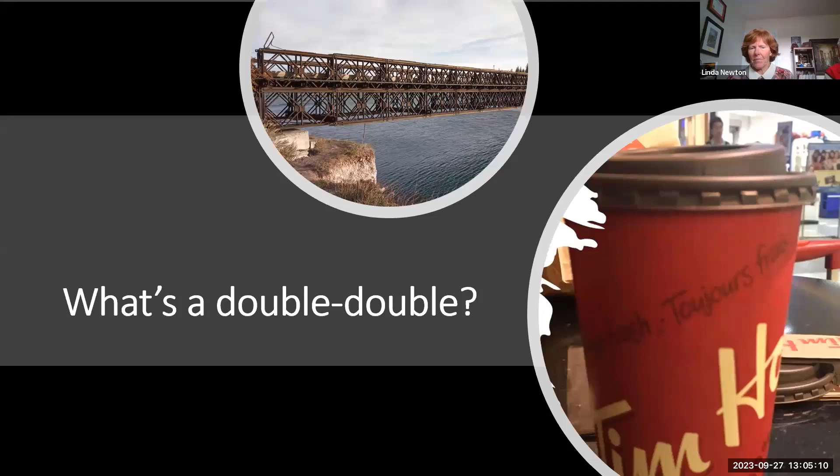Well, you're going to find out.

So the presentation isn't completely about the Royal Canadian Military Engineers. Obviously, we have to set some context and go into the Bailey Bridge and its design and what was so unique about it, give you a bit of background about the Royal Canadian Engineers. Some of you may know, I'm sure we have quite a few engineers listening. Then we'll talk about why it was so special to World War II and what made it what it was, and realize, as many of you have seen this bridge and not know it is still out there and not realize what it was. So we'll look at that.

So to come back to the Bailey Bridge and to come back to the role of military engineers, whether they're the Royal Canadian Engineers, the Royal Engineers in the UK, or the Engineer Corps in the US, the military engineers' role is to support mobility of friendly forces and deny that mobility to the enemy. So in times of conflict, engineers build roads, they build bridges, and at the same time they destroy them so that the enemy can't use them.

Now, the design of the Bailey Bridge was first proposed by Donald Bailey in 1936. He was sketching on the back of a napkin. He was a model bridge enthusiast, and he worked for the Experimental Bridging Establishment in the UK. Now, as the war continued, people looked at his design and went, 'That's really nice, Donald. Now go away and do what you normally do.'

But as the war continued and the Allied forces started to gain ground and the momentum started to shift, they started to consider the invasion of Europe. And there were two places they were going to invade Europe, Italy, and also hopefully landing at Normandy. And obviously, the retreating forces, their engineers would be blowing up those bridges. So you needed to have some means that the advancing forces could quickly get over those gaps, whether it was over a canal, over a river, a tank ditch, or something they had constructed to impede mobility. And the retreating Axis forces destroyed virtually every bridge to delay the advance.

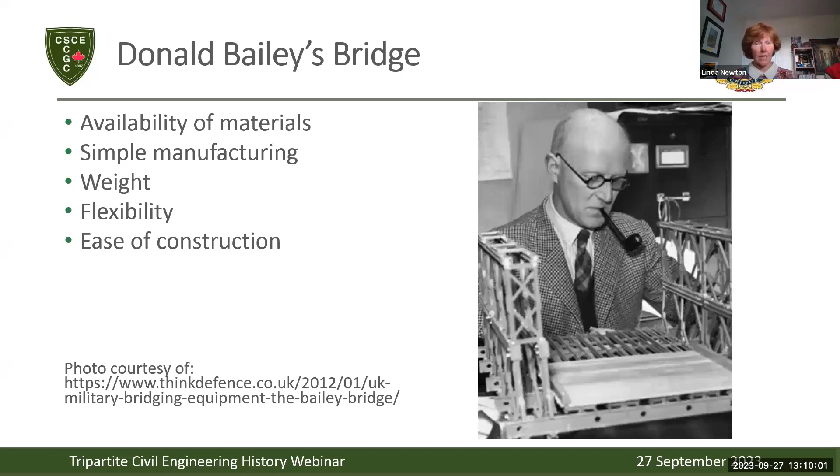So this final design had 28 welded steel parts. There's some discussion as to whether it was 29, but the consensus is 28 parts that you can see here, varying from things such as the stringers, the transoms, the panels. The panels were the key component.

Now, what was remarkable about this bridge is that an engineer troop comprised 40 men at the time, and they could assemble, under perfect conditions, a 24-meter or 80-foot bridge in about 4 hours by day and about 8 hours by night. And they could push that bridge across the gap. Larger bridges, you may need to bring up a small dozer to help, but that was the extent of what was needed at the time for Bailey's Bridge.

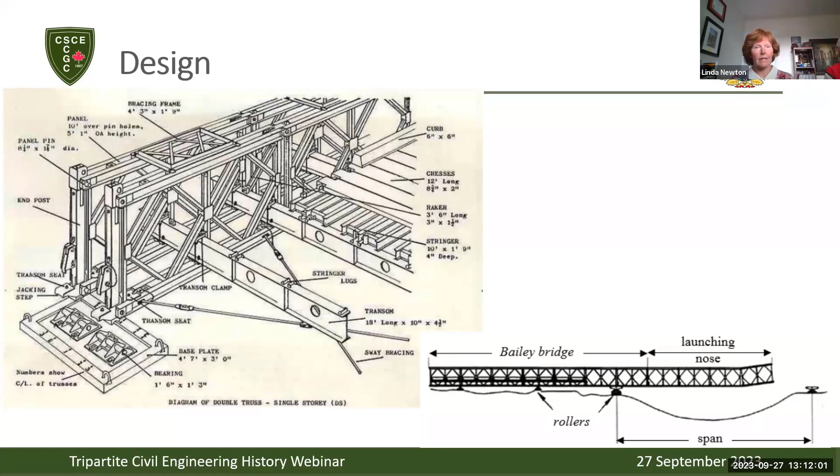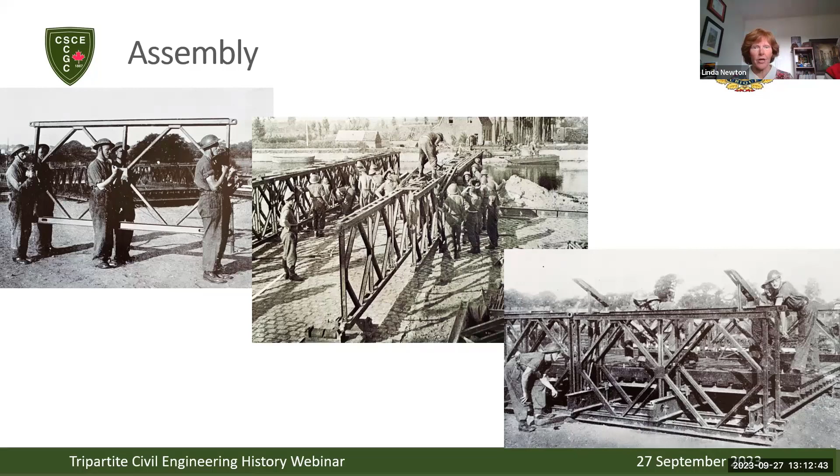But in the middle picture, at the very front of it, you can start to see that roller, and that's the nose that was going to be launched over the gap. This picture on the bottom right is an example of what that bridge would look like. I think this was when they were doing training at one of the bases, perhaps, to learn how to construct the bridge. So now think back to that double-double word.

So the configuration of the bridge became known by how it was built. A single truss, meaning it had 1 panel wide and was 1 panel high, was a single. If it was 2 panels wide and 1 panel high, it was a double single. And hence the double was a double panel, so double truss, double story. And so that is where the acronym double-double came from, not from Tim Hortons. I'm not sure if Tim Hortons stole it from the engineers, but you still hear that terminology. You'll hear triple, somebody wants 3 creams and 3 sugars. But a triple would be a Bailey Bridge, 3 trusses wide, 3 stories high.

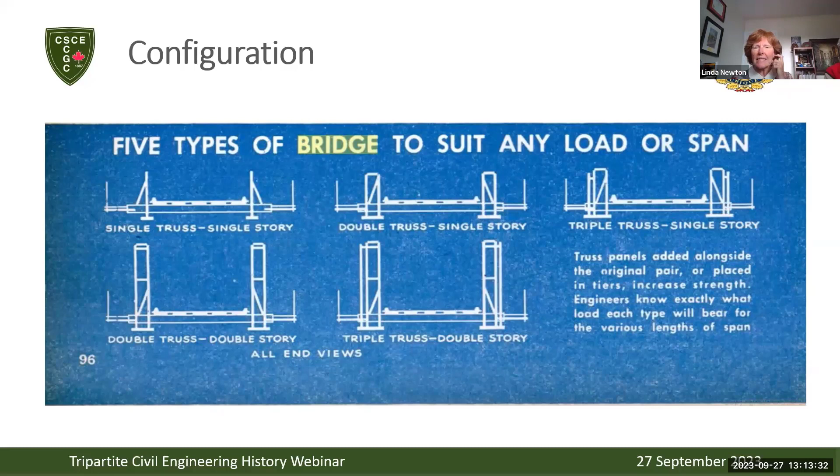Now, the next slide I'm going to show you is to give you a sense of the load capacity. So this is the military load class. And I know there are a lot of numbers on this slide, but the intent behind it is to give you an idea of the load capacity, how it increased based on the configuration of that bridge.

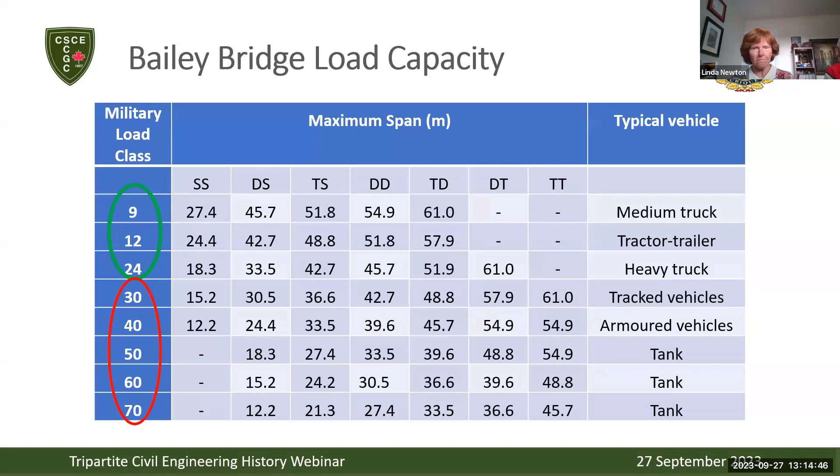I mentioned earlier about variations. Not every gap is going to be a dry gap. And so the unique nature of this bridge is that there were 4 basic variations that you could have. You could have a single span bridge, or you could have a multi-span bridge that would use perhaps existing piers. You may have to repair those piers to span greater gaps. Those would be used to replace a bridge that had been destroyed by enemy forces.

There was also a floating or a pontoon bridge, which was pretty cool. The bridge would be built on pontoons in sections and floated into place and then linked up. And so these were the types of bridges that would span, say, the Rhine or the Arno, or other longer gaps.

And that was particularly important because the canals were necessary to move materials as the forces advanced through Europe. As many of you may be aware, there's quite an extensive canal system in the Netherlands, in France, in southern Germany, and Western Germany. And so this lift bridge was developed to replace very low temporary spans over canals.

So in total, over 600 firms were involved in manufacturing this bridge. Over 500,000 tons, that's not metric tons, were eventually constructed of the Bailey Bridge, all to support the war effort.

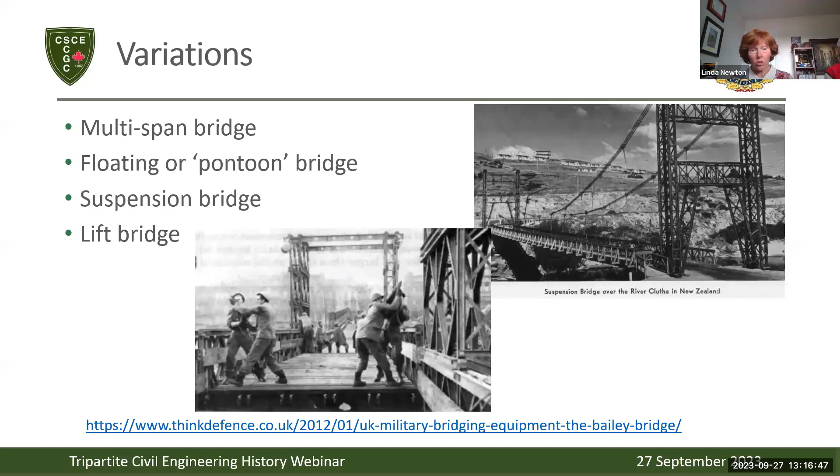So now back to another part of the title, the Royal Engineers. The Royal Canadian Engineers have been around for a little over 100 years. And the Corps, if you like, itself was formed in 1903 out of militia units. Before that particular time, you would have some professional soldiers, you would have ad hoc militia groups.

In fact, here where I live in Ottawa, one of our most famous pieces of infrastructure is the Rideau Canal, which was built by the Royal Engineers and Lieutenant Colonel John By. But in 1903, all of these units came together to create a regular force unit, and that became known as the Royal Canadian Engineers.

By the time the Second World War came about, you can see the ranks had swelled to what you see here: 680 officers, almost 16,000 other ranks, from sappers or privates up to chief warrant officers. And these engineers punched well above their weight, as you're going to see in the next few slides.

Canadian Army war effort was assigned, among many things, to building Bailey bridges to support the advance through the Italian campaign, into Sicily, and into Northwest Europe. The three battalions that formed part of this establishment took on the construction of many of the major bridges in World War II.

And during that time, the basic unit was a field company or a field squadron, and it would have had 7 officers and 249 other ranks. So that was who would be involved in building these bridges as a basic unit.

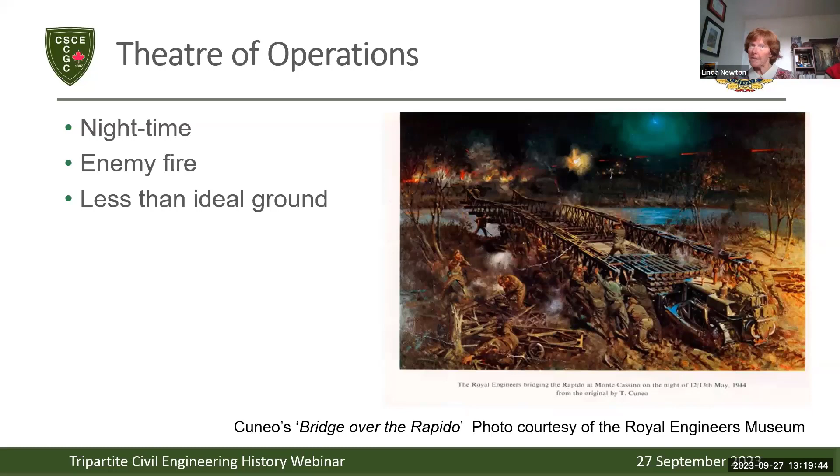Let's take a moment and look at some of the construction. I'm going to focus more on the Canadian engineers, but there were some very interesting bridges built by the Americans and by the Royal Engineers.

The River Medjerda was one of the first bridges built in 1942 in the North Africa campaign. That particular bridge is the one being built when I referenced that soldier, that sapper, earlier. That quote came from the building of the Medjerda Bridge. It was a double single bridge, and you can see here sort of the gap that it spanned.

Then we started to get into some of the more interesting designs of the bridges. The bridges over the Sangro and the Grub, for example, two completely different countries, one in Italy, one in India, built by the Americans and the Royal Engineers.

Now you start to see the pontoon bridges were built. Then the Tyne and Tees was quite a major bridge. I believe this was one of the longest bridges built at its time, and it was built on existing piers. There had been some piers in place that either had to be repaired, or they could build this bridge and launch it over those piers.

Here's an example of one of the suspension bridges that was built in Burma. This is the Shweli River, would have been built by the US Army. That was one of the rare examples of a suspension bridge that was built, and again you can see the length.

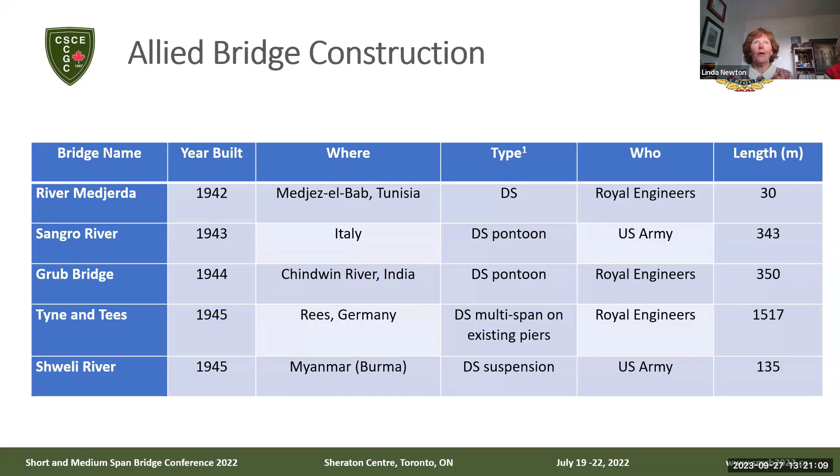Coming back to our theme of the Royal Canadian Engineers, perhaps the greatest role that the RCE played initially was in Italy, in Sicily, in the Liri Valley, and as the Gothic Line was breached and the Axis forces were retreating out of Italy. You'll see two here are starred, Leonforte and Blackfriars, and I'll come to those in a moment. I've got two special slides about those.

Ortona, a triple single bridge, was built by 4th Field Company, and you can look at the length here. The Winston and the Churchill bridges are quite interesting.

The RCE supported the push towards Germany, particularly through the Netherlands and into northern Germany. These two bridges were built: one called the Winston Bridge, the other the Churchill Bridge, across the Orne in northern France. There's a really good picture I didn't include here, there were so many pictures to choose from, but there's a great picture of Winston Churchill driving across, I think it's the Churchill Bridge, in his Jeep sometime in late 1944.

The Walsh Bridge, again, the Maas was quite a large river that had to be crossed, and you can see the length of that one. That would have been a pontoon bridge.

The Jones and the Tatham bridges were also interesting because, as I mentioned about the canals still being necessary to transport materials, the RCE, because of their expertise, were instructed to build two lift bridges and decide what the best design was. So they tried two designs. One was named after Jones, the commander building that bridge, and one was named after Tatham, the other officer in charge of the bridge.

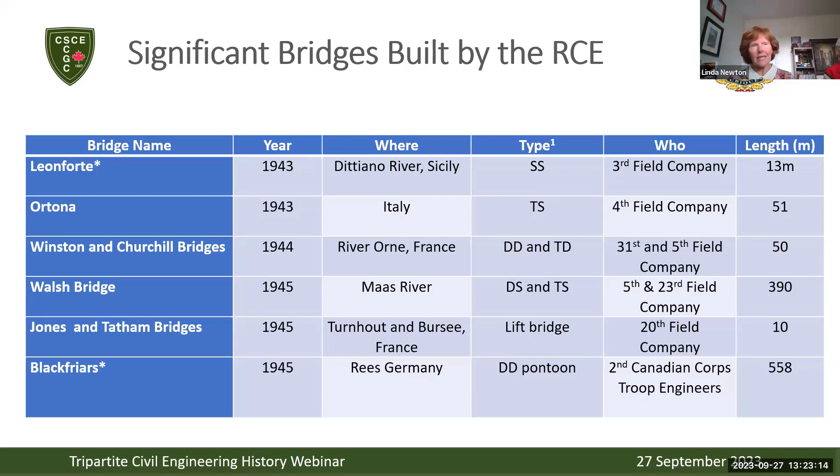Now, I said I would come back to Leonforte and Blackfriars. Blackfriars was where the Royal Canadian Engineers were asked to build a bridge to cross the Rhine at Rees in Germany, and at the time, it was the longest bridge built.

Two 34-meter landing bays so the vehicles could get onto the bridge. You had these 34 connected spans, and this gives you a sense of the pontoons, how they were connected together. What was remarkable about this bridge is it was built in under 72 hours from this Bailey kit. In fact, it was so successful that the officer overseeing the construction was awarded the Military Cross. When completed, it was the longest Bailey bridge built at the time.

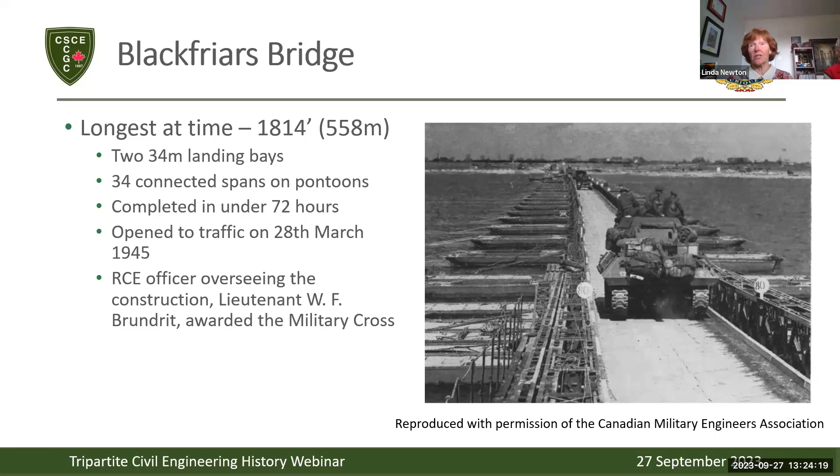This bridge was built in 1943, and it has the distinction of being the first bridge built under enemy fire. So that picture you saw at Monte Cassino, imagine that scenario when this particular bridge was built. When they went to build the bridge, they came across an enemy machine gun post and an infantry platoon, and despite all of that, they were able to build this bridge in 4.5 hours under enemy fire. It wasn't an overly long bridge, but it was the conditions under which it was built, and it was a critical bridge for this particular gap.

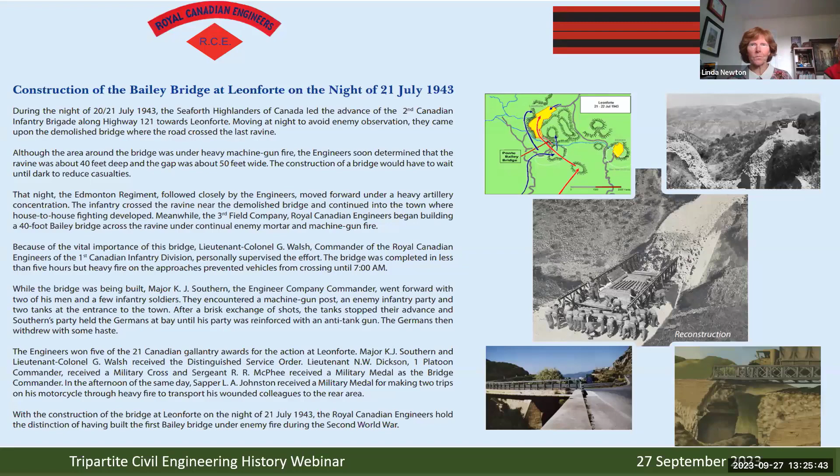So the war started to wind up. These amazing bridges would have been dismantled. Certainly the pontoon bridges were dismantled. Some of the other bridges stayed in place for a while. But Bailey Bridge construction didn't end with the resolution of World War II.

Following the end of the war, this massive Bailey stock that was in the UK and Europe was disposed of individually in the various countries. Many of the Canadian stock was sold as surplus through the Canadian War Assets Corporation, and public sector organizations bought a lot of this stock. In fact, one of the largest owners in the world for a period of time was the Ministry of Transportation in Ontario and the Ontario Hydroelectric Power Commission.

So what started as this modular temporary bridge became this lifeline for many. It was critical to rebuilding efforts after the war, either as a temporary bridge, and it became part of natural disaster response. We'll look at some examples of these in a moment in Canada. But its versatility was just phenomenal, and in fact, it still is used.

One of the most recent Bailey bridges built was in the mid-1970s, in Australia across the Derwent River after the Tasman Bridge collapsed. The highest bridge in the world is still there, in India, built by the Indian Army in the Ladakh Valley. So it's a testament to the robust design of this bridge, how so many of these so-called temporary bridges remain in existence.

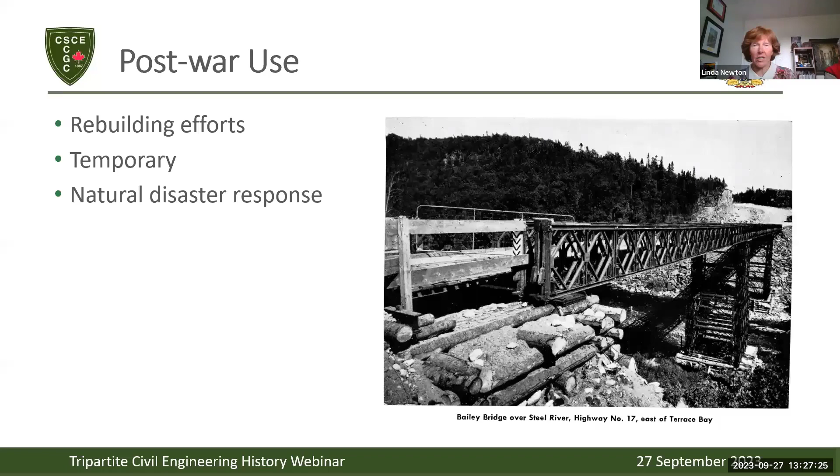And so we're going to look at a couple of interesting ones that are here in Canada, and many of the early ones still have that link to the Royal Canadian Engineers, because many of the people that left the service after the Second World War went into the private sector and the public sector, and they became the foundation of the engineers.

So in Canada, one of the first bridges built, Hurricane Hazel, was a major disaster that rolled through the Toronto and Southern Ontario area in 1954. The bridge you see on the right was built over the Rouge River, called the Old Finch Avenue Bridge. It was built in 1954 after the flooding from Hurricane Hazel washed out the bridge, along with many, many other bridges. And so the Royal Canadian Engineers were mobilized, just as they are today, in support of aid to civil power. They went throughout Southern Ontario building Bailey bridges to span these gaps.

And so in 24 hours, you had a bridge that was operational and the traffic could continue to move. In fact, this bridge is still in place. It underwent a retrofit and strengthening of the deck in the early 1990s, but it's still there. You can still go and see this bridge.

The other one on the left was one that I hadn't even realized was there. I spent my high school years in Toronto. Many times I would go down to something called the Canadian National Exhibition, cross this bridge on Lakeshore Boulevard, completely unaware that it was a Bailey Bridge built by the Dominion Bridge Company in 1952. In fact, it may still be the oldest publicly constructed Bailey Bridge in Canada. And then the Great Trail, the Trans-Canada Trail.

Next time you go along it, take a look at some of the bridges, because as part of their centenary in 2003, the RCE was involved in constructing many small bridges along the Trans-Canada Trail, and a lot of them were Bailey bridges. I think the first one built was a double-single Bailey bridge at the Creston Wildlife Center in British Columbia, named after Master Corporal Mark Isfeld, who was killed removing landmines in Croatia. The most recently built one is an 85-meter bridge across the Chedoke Radial Trail, built in 2020. So they're still being built and still being used.

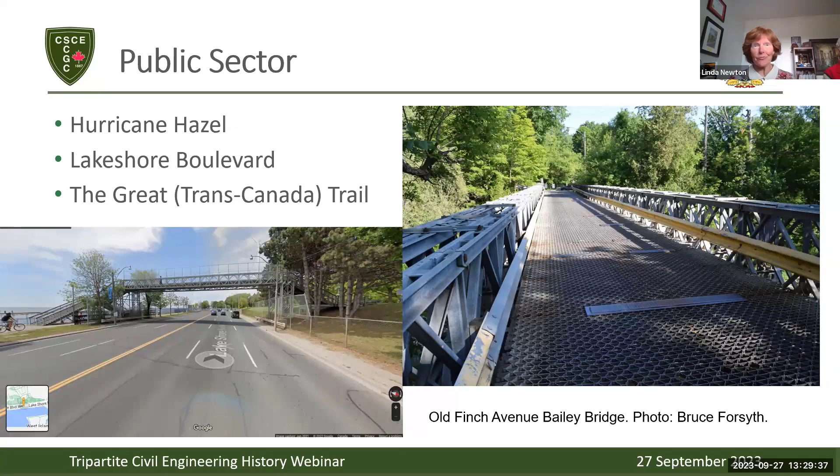But one of my favorite bridges - that's the public sector - one of my favorite bridges is in the private sector. This particular bridge, I don't know if any of you will recognize it, is the Kananaskis Bridge, near Seebe, Alberta. It's interesting for several reasons. First of all, most Bailey bridges have the deck at the bottom with the superstructure on top. But in this case, the deck was lifted at some point over the past 50 years to run midway between the panels.

It was constructed after the collapse of the original bridge. As it would have it, the general manager of the plant was a retired World War II field company commander, and he'd remained in contact with his wartime buddies. When this bridge collapsed leading into this private plant, he called them up and said, hey, we've got to replace the bridge, let's get a Bailey Bridge. So Ontario Hydro stock was used, and this bridge was built by retired RCE members for the Canada Cement Company.

And this bridge still stands. I took this picture last summer. It hasn't been reinforced in any way - all the parts are still there. It is a triple-double, and at the time it was constructed in 1950, it was the first and longest private Bailey Bridge built in Canada and in the world. I think it's still probably the oldest Bailey Bridge in Canada - Ken will be able to correct me later if I'm wrong. I mentioned that the Lakeshore Bridge is probably the oldest public bridge; this is probably the oldest private sector Bailey Bridge that still exists.

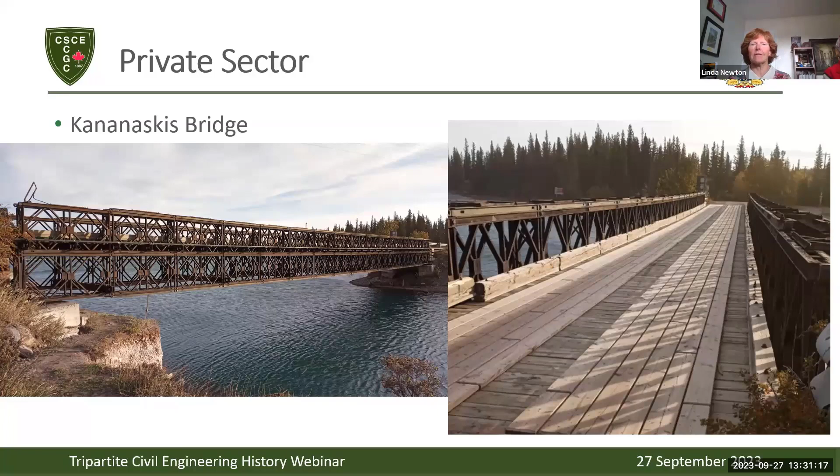So what about the future of the Bailey Bridge? It's been over 80 years since Donald Bailey first designed that modular prefabricated bridge. Military engineers continue to use it to this day to support their own operations, as well as disaster relief efforts. It's become a staple of many organizations that use it as a temporary bridge, a permanent bridge in hard-to-reach locations, or even as a trail bridge. You can go back through Ministry of Transportation Ontario records and see how many times it was built as a temporary bridge when the Trans-Canada Highway was being built, certainly through areas in Northern Ontario. It's just phenomenal - to this day it's part of the Canadian fabric.

The Bailey itself in this format has been slightly modified - it's not quite made the same way. Mabey Bridge is one of the original manufacturers of the Bailey, and they continue to produce a modified version of the bridge. Acrow is another company that builds the Bailey Bridge and also produces a modified version. Both can be installed and disassembled after their use. China still probably produces a large volume of the original Bailey design, and many other companies make modular prefabricated bridges, but they're nothing like the Bailey Bridge that can be put together, disassembled by hand, and reused.